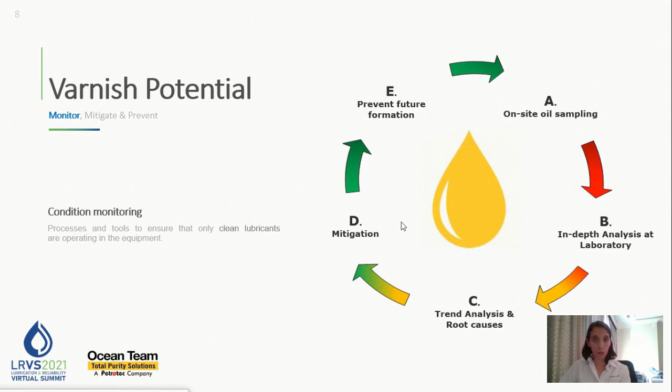After having at least 3 consecutive results to follow the trend of each parameter, and according to the oil condition based on the sample reports, history of the machines, any issue reported by the customer, and of course the planned maintenance activities of the customer, we analyze along with the customer the best solution to mitigate the varnish if it is already there, and to prevent future formation if it's building up.

How are we mitigating the varnish, or supporting our customers to mitigate the varnish? Various technologies have been developed, such as electrostatic and filtration, to remove the varnish. However, these are more related to the varnish that is in suspension.

Yes, it's a good technology and will remove the insoluble varnish in a short time, but it's not a long-term solution because it's removing only the varnish in suspension.

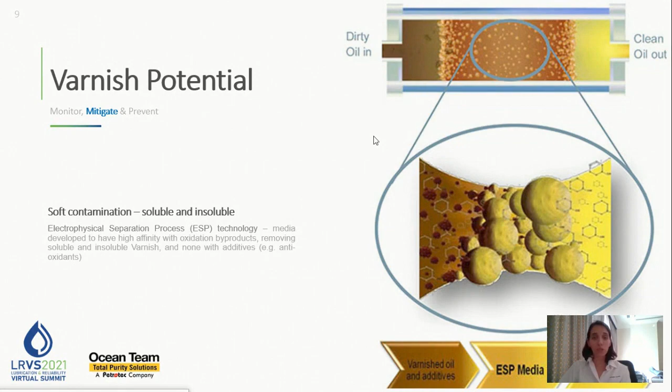Then electrophysical separation process technology has been developed to increase the performance of these filters, in this case resins, a media blend element that can remove the varnish, insoluble and soluble, because as per different studies, a large amount of varnish in the operating system is in solution, not in suspension.

As the leading oil care services provider, and along with the different equipment OEMs, we are providing the Solvancer technology in Qatar, representing our partner, and we are applying it at different major oil operators. Specifically, when the customer wants to extend the life of the oil, we are applying Decon along with the electrophysical separation process unit.

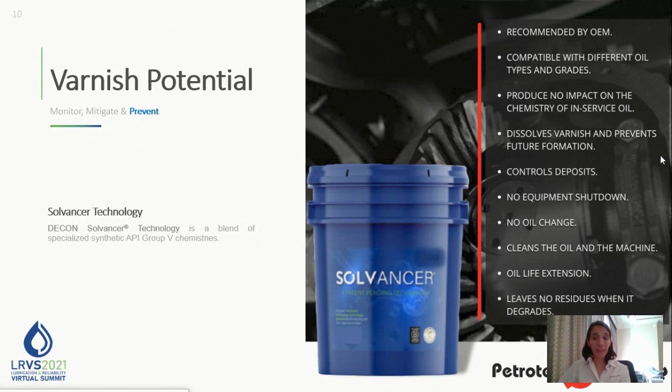Why Decon? Because it's recommended by the OEMs, is compatible with different oil types and grades, will not impact the chemistry of the in-service oil, and can control the deposits as well. Most important, you don't need to shut down the equipment, and it leaves no residue when it degrades.

At the beginning, we were talking about Qatar being the pioneer of the GCC countries applying Decon Solvancer technology onshore and offshore related to varnish issues. As discussed, we are applying the electrophysical separation process along with the addition of Solvancer technology.

In the next slides, I will show you some case studies where Decon Solvancer technology and electrophysical separation process technology have been applied to respond to the different challenges our customers bring to us, and to extend the life of their oils for critical machines. I will show you the case studies with the challenges, the solutions and respective results.

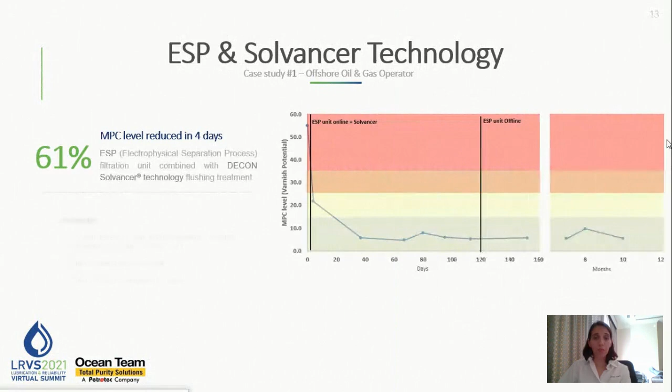As a first case study, I'm bringing one from offshore, related to a Solar turbine, a gas turbine. For this specific case, the customer came to us requesting our support to avoid a third oil change in 2 years. Yes, it's true. The customer did a complete oil change, first an oil upgrade and then a second oil change in 2 years. We are talking about around a 6,000 liter reservoir.

After an in-depth analysis of the oil, a few months after performing the oil upgrade and the second oil change, the oil analysis was showing high MPC. The MPC was stable, however critical, above 50. The customer also reported high bearing temperatures since the beginning, since the first oil upgrade and the second oil change.

After discussing with the OEM and with the customer, the solution applied in this case was the electrophysical separation process and Decon Solvancer technology. With these two technologies, as you can see in the graph, it was possible to reduce the MPC level to less than half during the first week after application, and in 1 month it was within acceptable limits, less than 15.

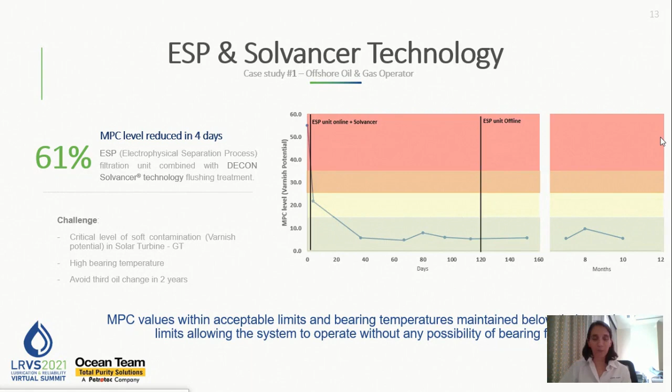Here, the challenge was, again, to avoid an oil change. This situation occurred after a recent oil change, less than 1 year. The equipment and the reservoir were not prepared in good conditions to receive the new charge of oil, and all the contamination from the previous oil came to the new oil. So the new oil, with higher solubility, brought into the oil in a few months all the contamination from the previous oil.

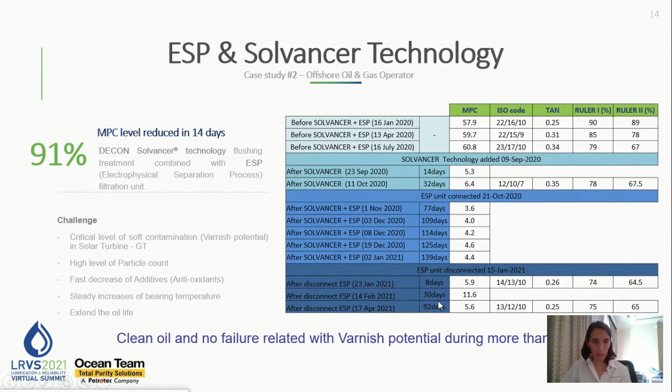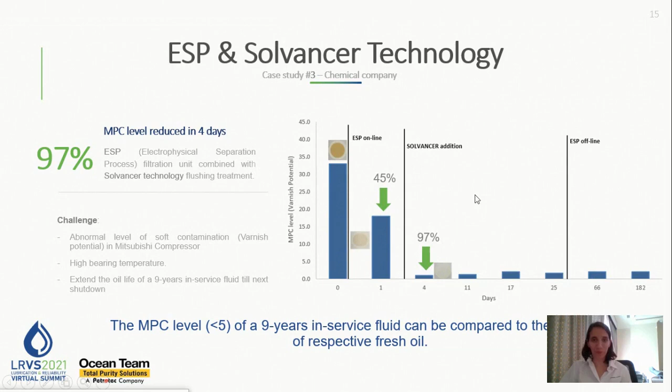I think I still have time to show you the customer feedback. We have been working with this customer for 4 years in an oil care program with the respective solutions, to support them offshore to keep their turbines and their oils in good health. ESP and Solvancer technology have been applied as well. Different Solvancer technologies, not only Decon, have been applied offshore for this specific customer.

The first question from our side to our customer was: what are the general issues faced by your company on turbomachinery and critical rotating equipment related specifically to varnish? And as per the customer response, high bearing temperatures and vibration alarms for 27 turbomachines across the field on different platforms. So we are talking about 27 machines.

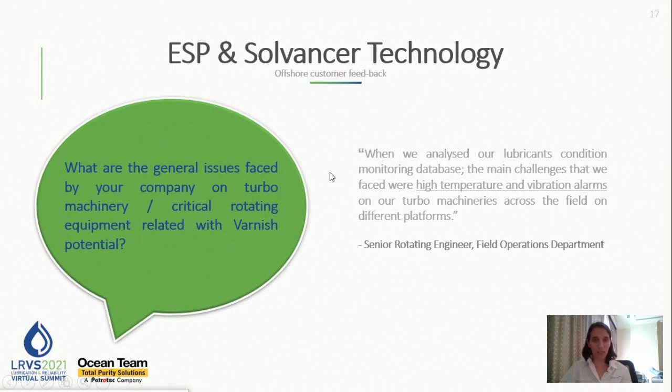Next question, of course, is what are the solutions that your company has applied to solve the respective issues recommended by the OEM and by the oil care services provider? There was a plan, as I was mentioning, during 4 years, an oil care program, and different solutions have been applied. As stage 1, oil sampling was performed following the sampling frequency of 3 months. Each 3 months, one sample was collected from each machine.

One trend was built with the data for the different parameters to follow the trend and understand the oil condition for the specific period. As a second stage, after analyzing the sample reports, understanding the health of the equipment, and all the reports that the customer gave us related to the symptoms of each machine, it was possible to give the best solution and recommendation for each machine, each oil condition.

And it was depending also on the maintenance activities that the customer showed us as a plan for this period of 4 years. In some cases, the customer requested us to extend the life of the oil. In other situations, the customer requested: we will do the oil change, please support us to prepare the machine to receive the new oil and avoid similar situations as the previous ones I was showing you in case study 1 and case study 2.

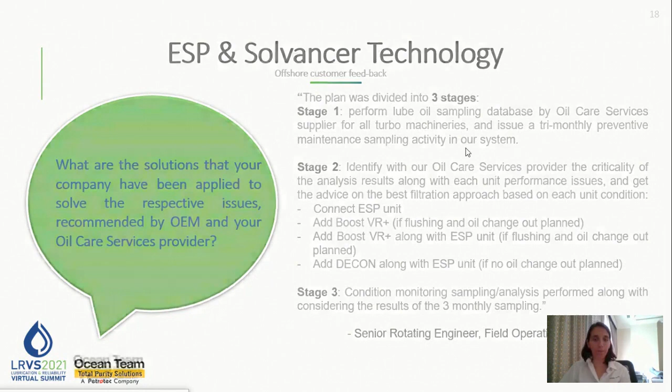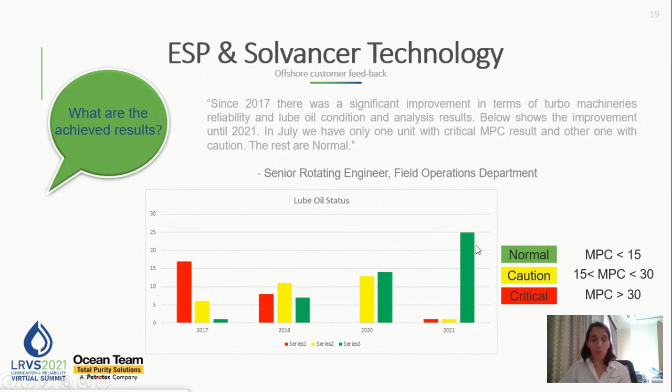Here, what you can see is this evaluation was performed based on the MPC level. However, all the other parameters are within acceptable level, I mean particles, acid number, water content, RULER for the antioxidant levels, RPVOT, foam, air release, and metals.